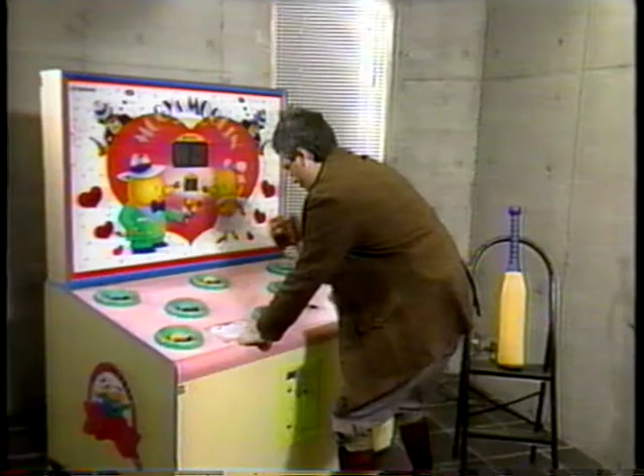I'm Dr. Zero. Z-E-R-O. Zero. And as my name suggests, I'm something of an expert on breakdowns. Welcome to my research institute.

Do you know this game? I love it. It's a great way of getting rid of one's frustrations, and I've got plenty of those. You know, you can hit the moles as hard as you like, but they still keep coming up. Of course, it's a lot of fun if it's just a game. But how much fun would it be if we think of the moles as equipment breakdowns in the factory,

Excuse me. Oh, come on. That's better. I don't know about you, but I have trouble with my equipment all the time. I suppose I'll have to call the electrician. Oh, where was I? Yes.

You know, lots of people think it's only natural for machines to break down all the time. Everyone gets the idea you can leave all after-sales service to the manufacturer of the equipment. In fact, I used to think that too. But it's not true. The point is, if you don't do anything, of course it breaks down. This applies equally to the home, to the office, and to the factory.

But remember, equipment is expensive. Why buy it if you can't use it? It should be used fully all the time. Like this tap. Now, just have a think about some common attitudes towards equipment, and I'll fix this.

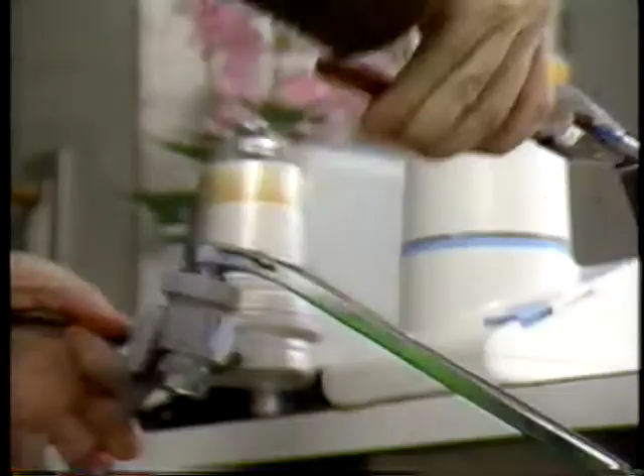Here are 4 common types of behaviour when we think it's only natural for equipment to break down. 1. We install equipment and leave it as it is. 2. We use machines but don't check anything after use. 3. We pay no attention to dust and dirt. 4. When a breakdown occurs, we call in the manufacturer. Good.

It's true though, isn't it? Most breakdowns are caused by very simple factors. Let me show you some examples. It's filthy. It hasn't been oiled for years. All the nuts and bolts need tightening up. Parts definitely need replacing. Things just aren't fixed on right. And basically, they don't work properly. It's the same story in the factory.

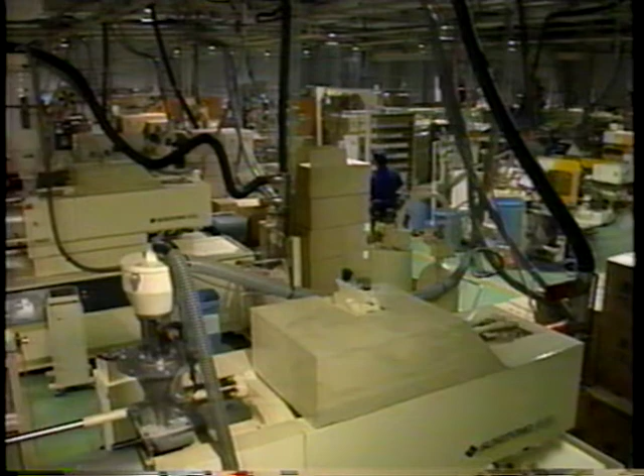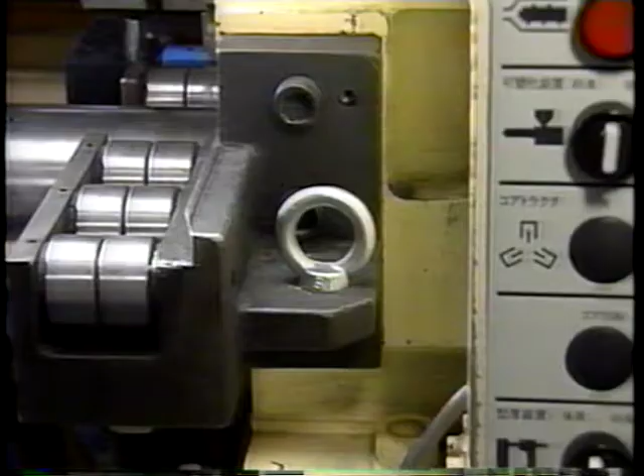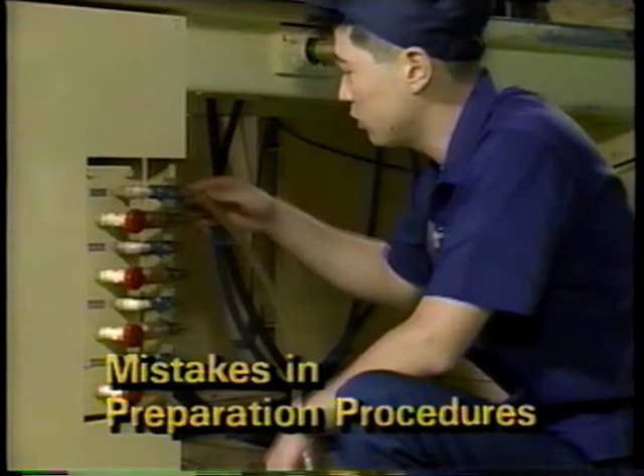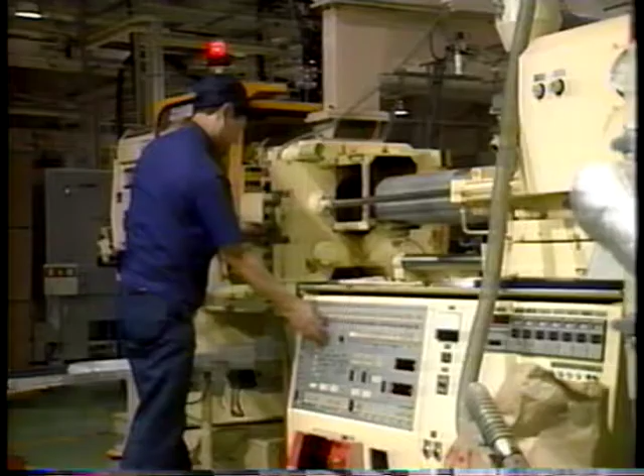The basic causes of breakdowns are these: dust and dirt, lack of lubrication, loose nuts and bolts, worn parts, mistakes in preparation procedures, faulty operation. In other words, breakdowns are mostly the result of misuse of equipment. The first step towards zero breakdowns is to ensure that all equipment is used properly.

Got the idea? You see, most of us start off thinking that machines should break down. But in fact, if we use them properly, we could get the idea that they shouldn't break down, that they should last for their allotted lifetime. It's as simple as that. Although actually, it's not quite so simple to achieve. We all want zero breakdowns. But where do we have to start looking?

When it comes to breakdowns, all we notice is major defects when we have sudden stoppages. Although breakdowns seem to happen out of the blue, their causes have been building up over time. Any moving parts like these gradually wear out, just like humans do. Even me.

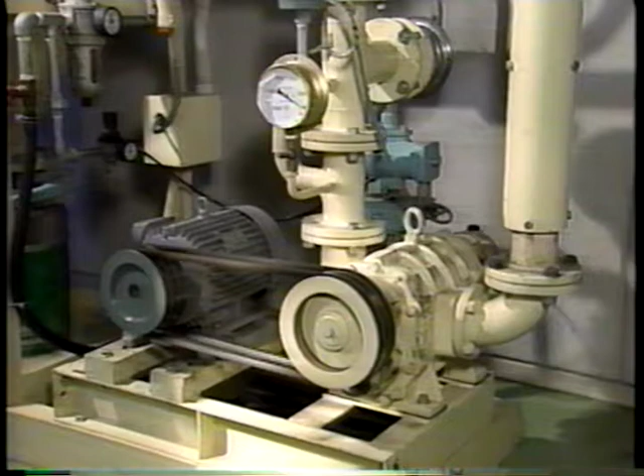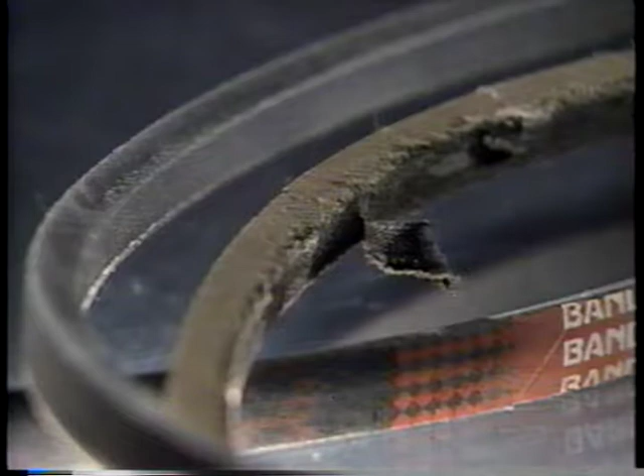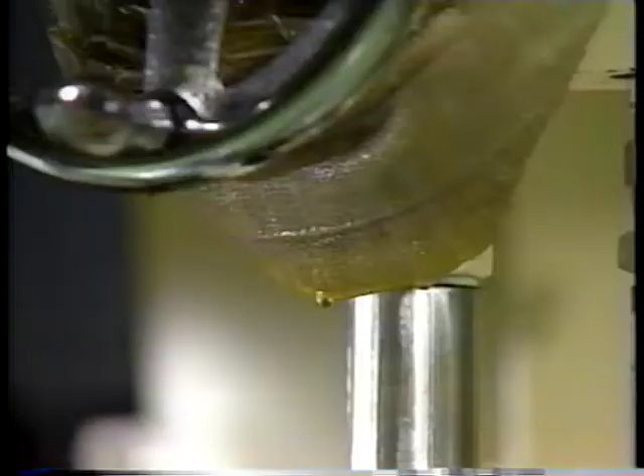The first cause of breakdowns is natural wear and tear, which happens even when equipment is correctly used. This is natural deterioration. Every machine has a natural lifespan, and this kind of deterioration is predictable and can and should be planned for. But improper use of equipment is a major cause of trouble. For example, if parts are not lubricated sufficiently, or if cleaning is neglected.

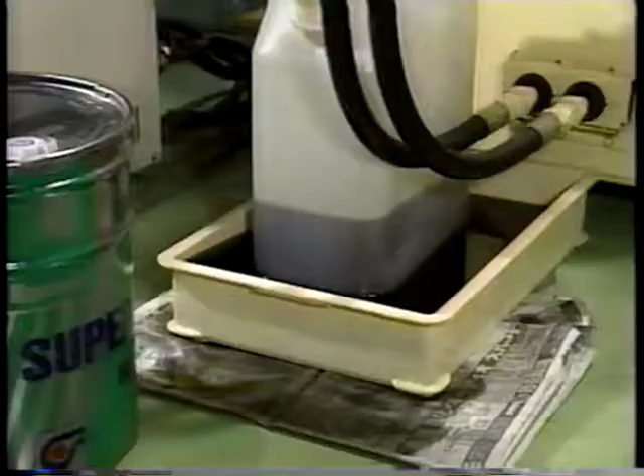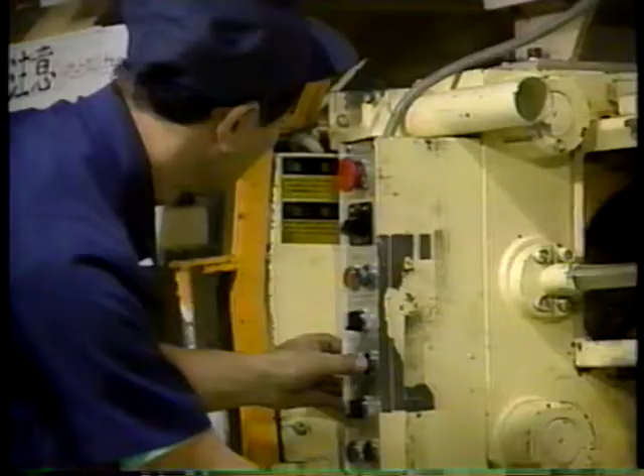Human errors result in aggravated deterioration, and this is a major cause of breakdowns. Laziness with regard to equipment maintenance can result in aggravated deterioration being added to natural deterioration. As time passes, many small defects pile up and result in major deterioration of the equipment. And a defect in one part easily leads to a defect in another part. The end result of all this deterioration is major defects which manifest themselves as major breakdowns.

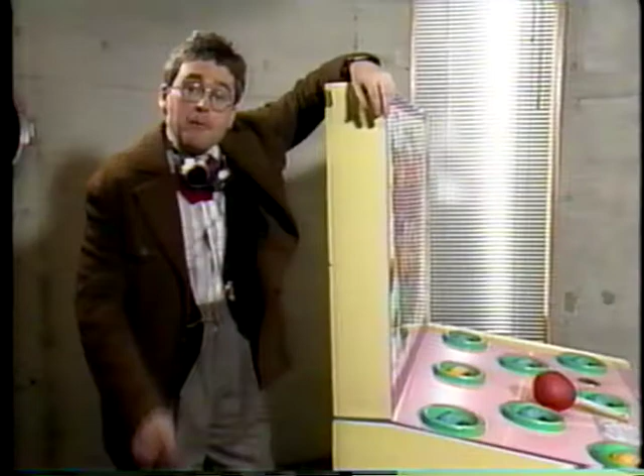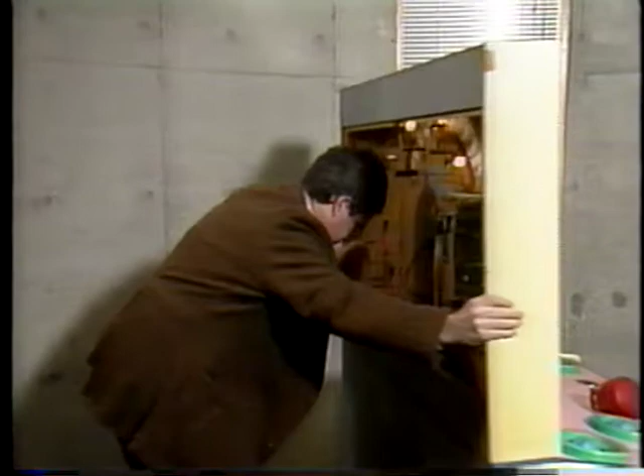Now do you see the connection with the moles? Breakdowns are just like moles. They're what we actually see. But the causes of the breakdowns are invisible. They're hidden down below. What we've got to do is to get inside somehow and reveal the causes. We know you're in there. Come out with your hands up.

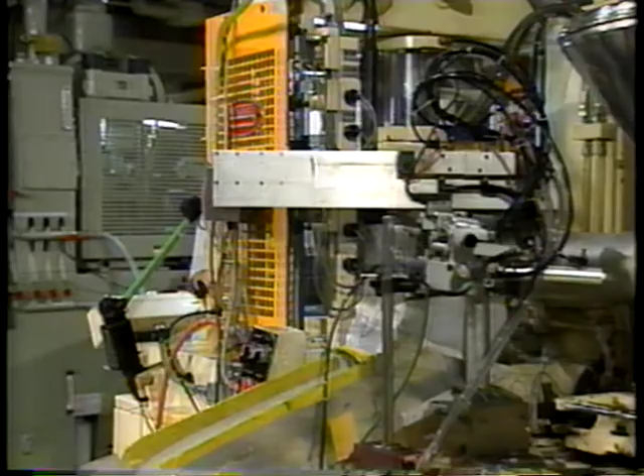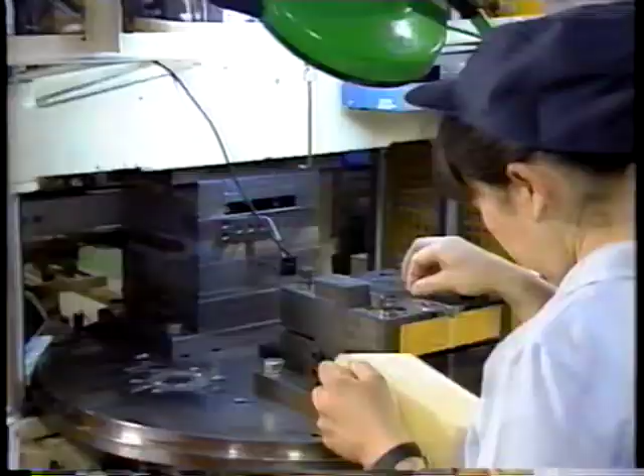Obviously, the person best equipped to find unseen defects is the operator who uses the equipment every day. The operator should be able to detect any small abnormality easily based on his or her familiarity with the equipment. Special sensors are not necessary for this. There is nothing better than using all your 5 senses.

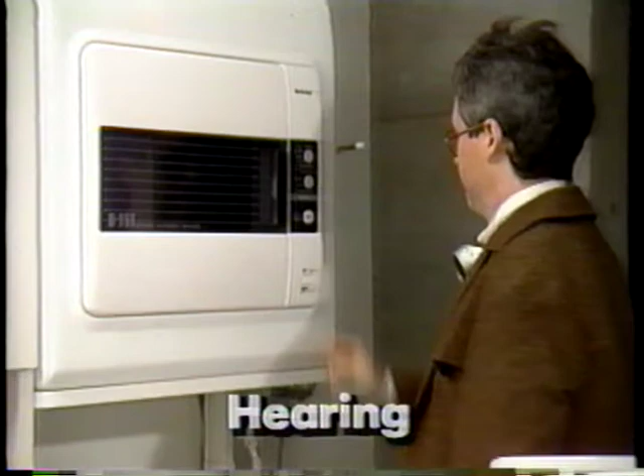The first sense is vision, which can be used to detect fractures, cracks, leakages, and so on. Second is hearing, to detect abnormal sounds, trembling, etc. The third sense is smell, to detect burning, overheating, gas leakages, and so on.

Fourth is touch. Both feet and hands can detect vibrations, shaking, and looseness of nuts and bolts, and the fingers can also detect abnormal temperatures. Fifth is taste. The tongue is a very sensitive instrument, and it can be very useful in detecting abnormalities.

The point is that we've been equipped with 5 natural senses. And we should use them all the time to give us information at work, just like we do at home.

Excuse me, I think the toast is burning.

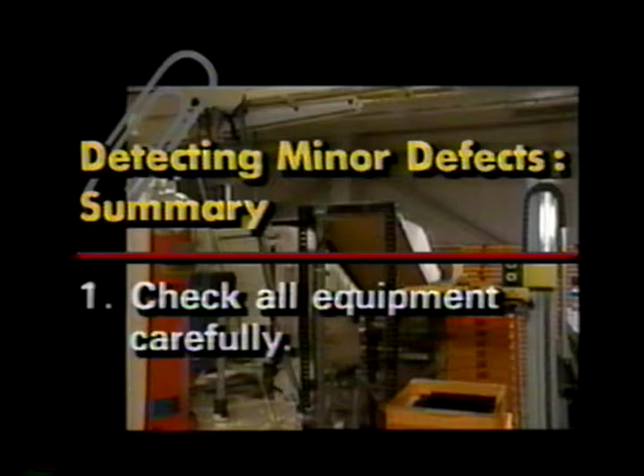Let's now summarize the 4 main points to help us detect minor defects in our equipment. 1. Breakdowns and visible defects are only the tip of the iceberg. This means that all equipment needs careful and regular checking. 2. We must find ways to reveal unseen defects before breakdowns occur.

3. Natural deterioration is inevitable, but we should avoid adding accelerated deterioration caused by human error. 4. All 5 senses should be used to discover abnormalities.

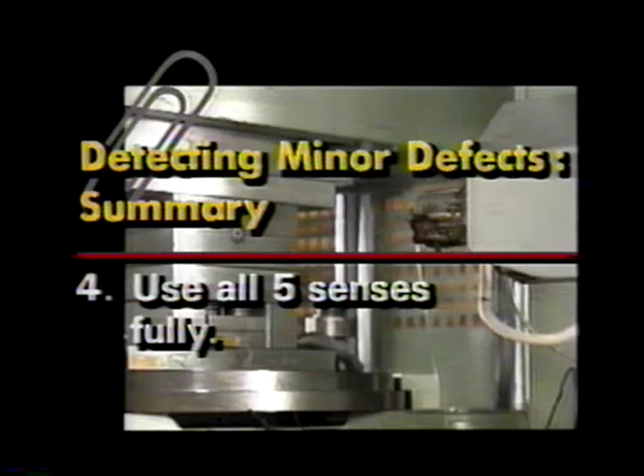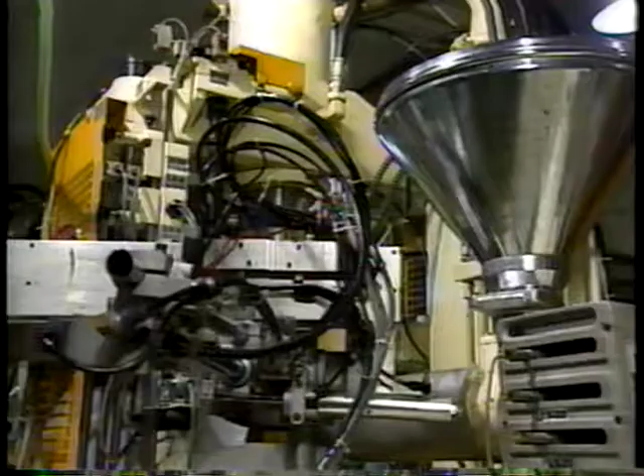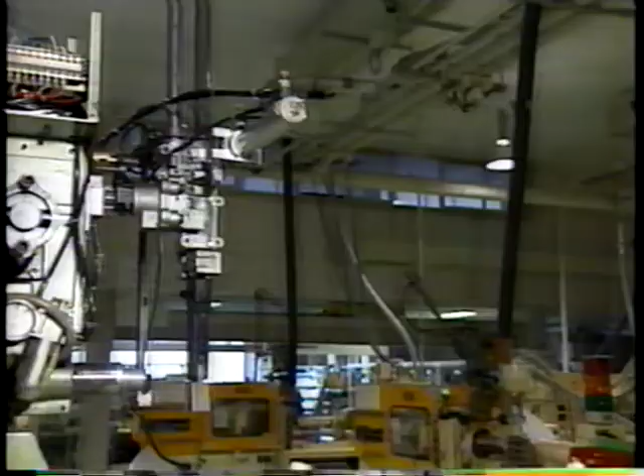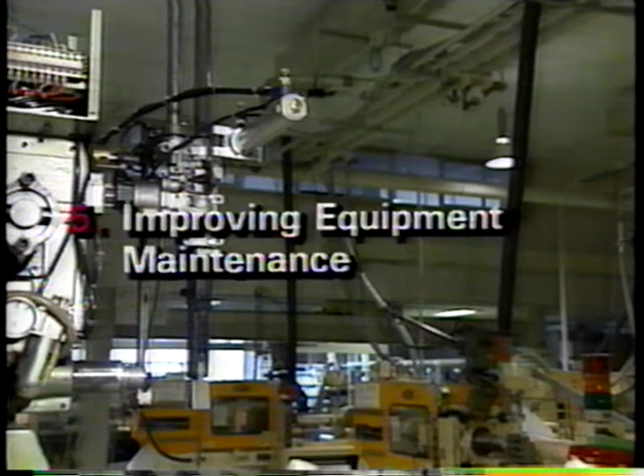Now let's look at 5 main points for improvement as we try to reveal hidden defects and avoid breakdowns. 1. Cleaning, tightening of nuts and bolts, and complete lubrication. 2. Proper use of equipment. 3. Revealing hidden defects and restoring original condition. 4. Reconsidering equipment design. 5. Improving equipment maintenance.

Yes, points for improvement. That's what we all need. Let's have a look at them in more detail.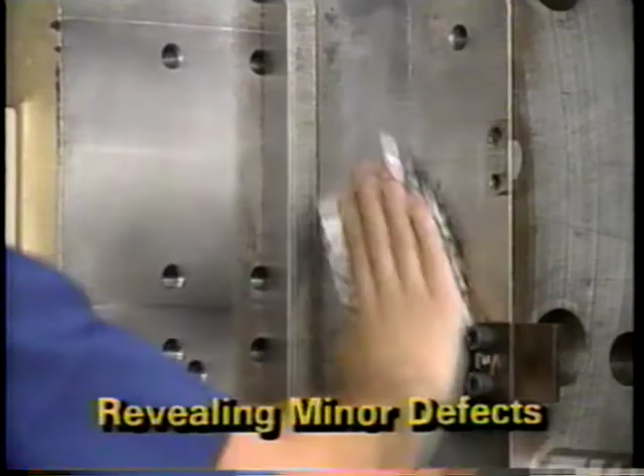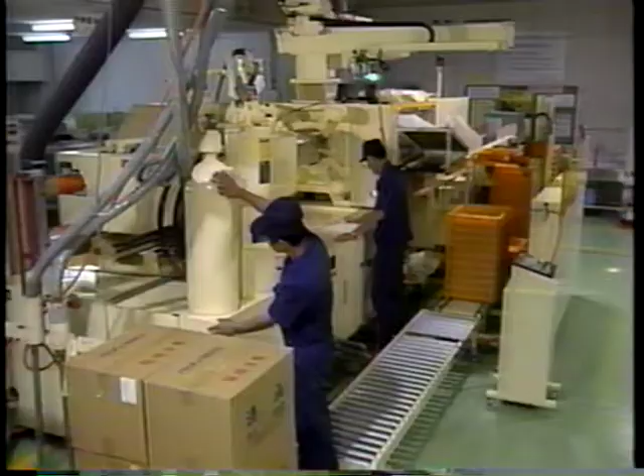Regular and thorough cleaning can reveal many kinds of minor defects, including dirt, worn parts, scratches, leakages, loose parts, and shape deformations. In other words, cleaning equals checking. This is an actual example of efficient and effective cleaning.

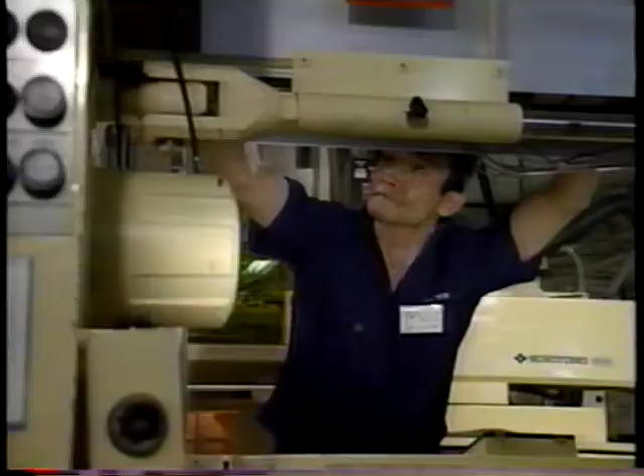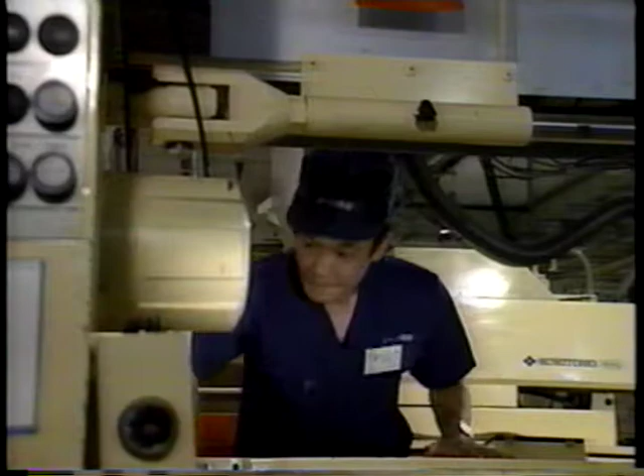In this factory, operations continue around the clock. Cleaning is carried out on each piece of equipment for 10 minutes both in the morning and the evening by 2 different people. The morning cleaning session focuses on discovering malfunctions or abnormalities that arose during the night shift. The evening session is simply for straightforward cleaning.

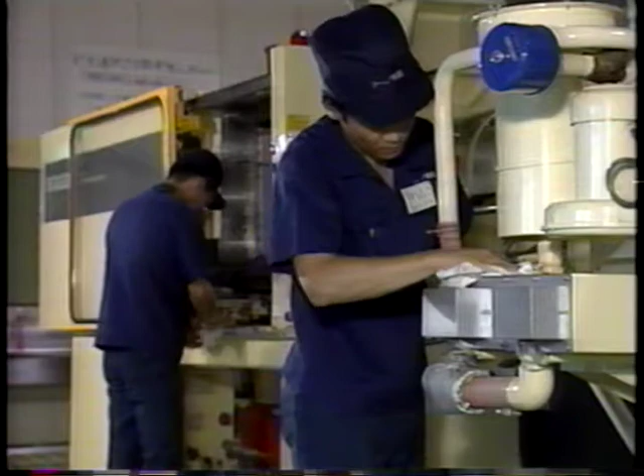This system means that every shift begins with clean equipment, and at the same time maintenance is greatly facilitated. The result is that breakdowns caused by dirt can be eliminated. Now some brief comments from the workers involved.

Loose bolts can quickly cause breakdowns, but we can only find which ones are loose if they're kept clean. Because we're cleaning the equipment every day, checking is made much easier. It's a very efficient method.

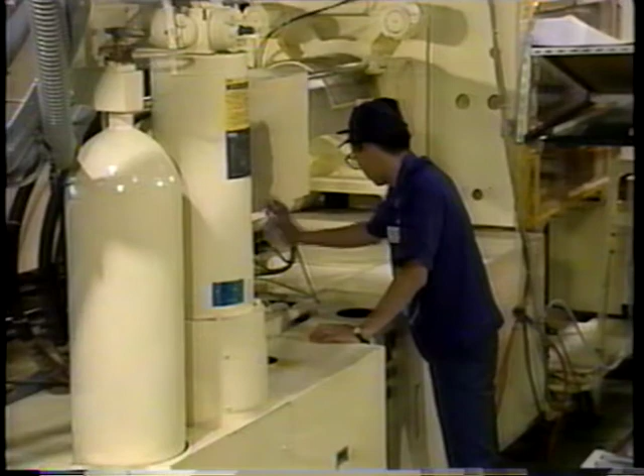The main point here is that a combination of regular cleaning and checking can keep the equipment working in just the way it is designed to operate, without stoppages. One loose bolt can cause vibration which loosens other bolts and so creates a dramatic chain reaction which ends in breakdown.

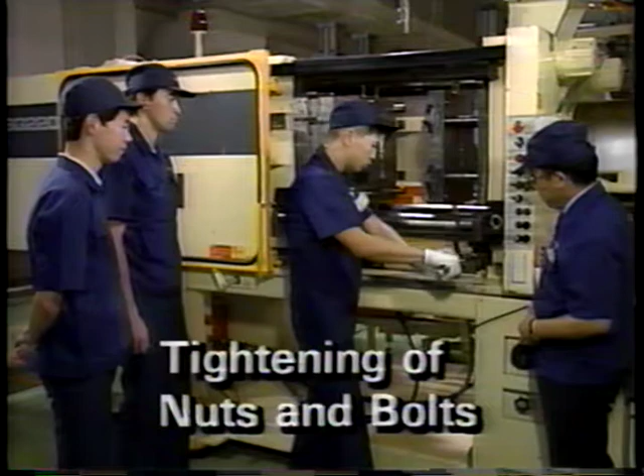There is nothing simpler than checking all nuts, screws and bolts to make sure they are correctly tightened and constantly rechecking to keep them that way. But this is often overlooked, even though it could cut breakdowns by 50%. Tighten it right and keep it tight.

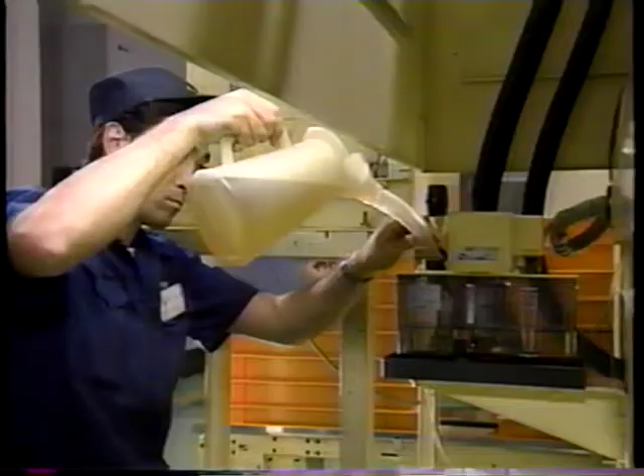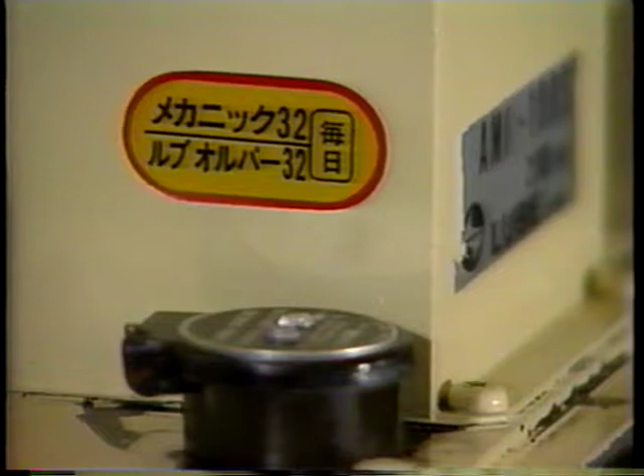Another obvious problem area is lubrication. Inadequate lubrication caused by laziness can lead to burning, rust and general deterioration of equipment. Clear lubrication labels, located right next to the lubrication point, can be very useful. They can indicate information such as type of oil needed, quantity and frequency of lubrication.

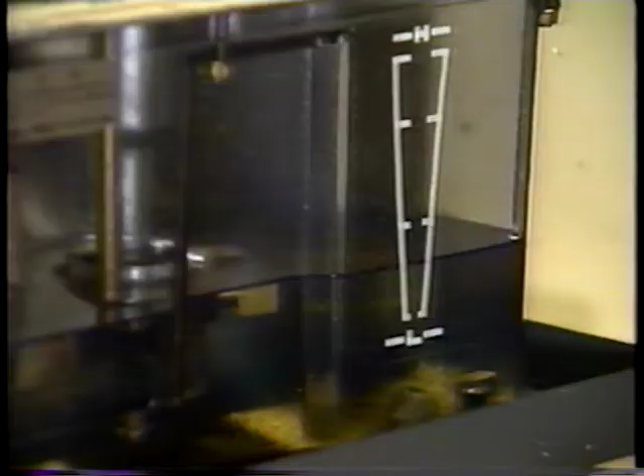These three straightforward processes, cleaning, tightening and lubrication, are vital steps for improvement in our drive towards zero breakdowns.

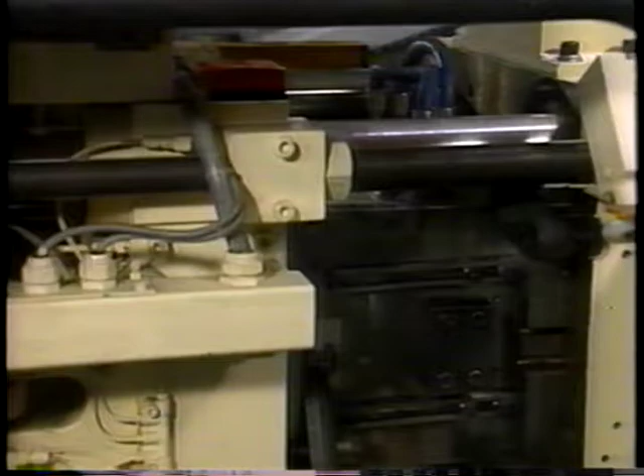Point 2 is concerned with how we actually use equipment. It's very important that operators really understand all the functions and correct operating procedures of any machines they are responsible for. Unless operating standards are strictly adhered to, breakdowns can easily occur.

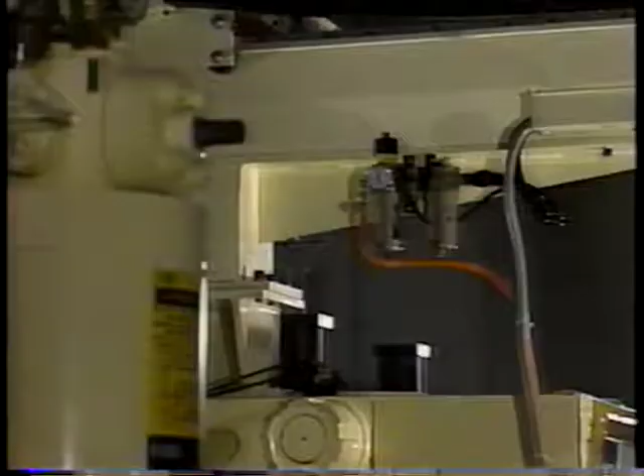As an example, let's take a look at a familiar piece of equipment, an air control unit which supplies lubricating oil to an air cylinder. The air filter removes dirt and moisture from the air sucked in from the outside. The air regulator provides the correct air pressure.

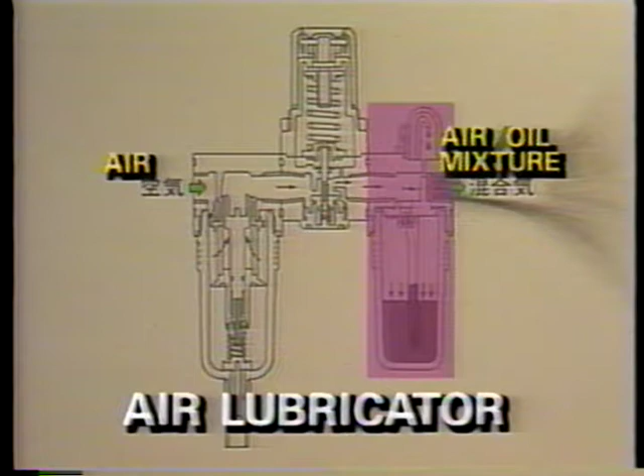The air lubricator uses that air pressure to deliver lubrication oil to the cylinder. To keep operations running smoothly, there is a fixed operating procedure for each part. Let's see what happens when these procedures are neglected. If the water is not removed from the air filter drain, rust can form inside the cylinder.

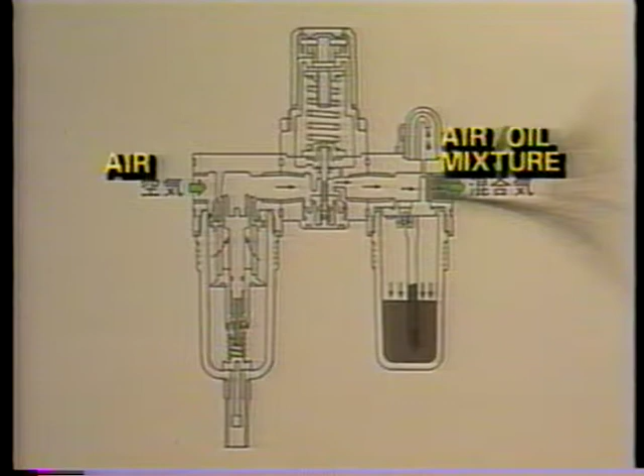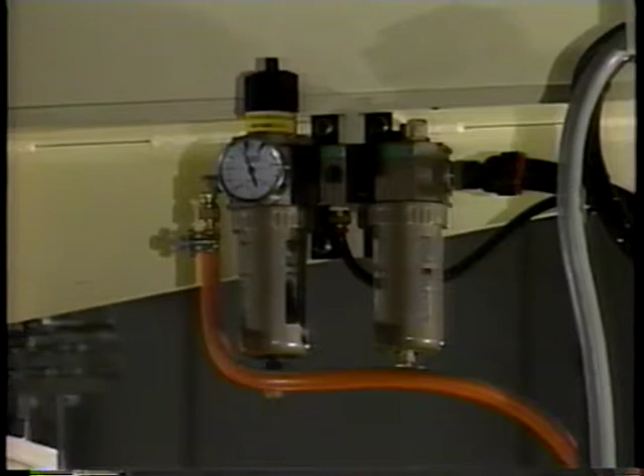If the air pressure is not properly checked, the pressure can become unstable. If a fixed amount of oil is not maintained inside the air lubricator, the cylinder will quickly wear out. And if the cylinder itself deteriorates, the result will be defective products. The point is that if we don't use every part of our equipment properly, defects pop up all over the place. Operating procedures for every part are rules which have to be kept. Break the rules and you break your machine.

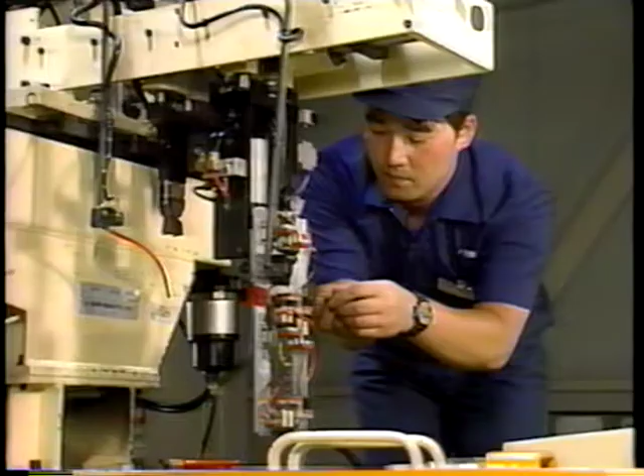As we've already seen, equipment naturally deteriorates with usage. But what can we do to keep deterioration to a minimum and avoid breakdowns? The watch has stopped. I just put new batteries in this last week. 1, 2, 3, 4. Now what's wrong with this?

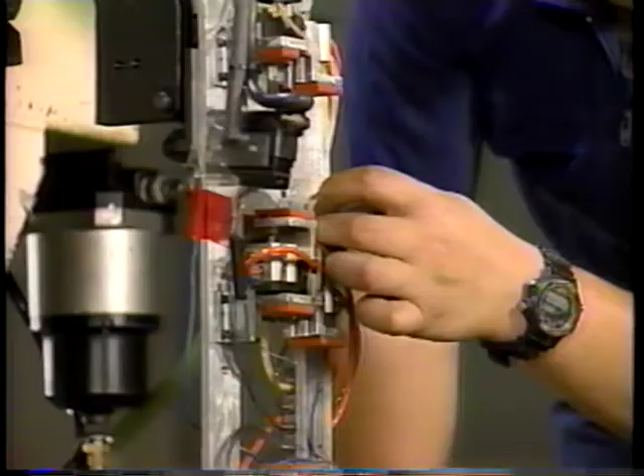Checking and inspection of all parts must be done thoroughly, so that any deteriorating parts can be spotted at once. As far as possible, we want to keep all the equipment close to its original condition, so that there is a proper working balance of the whole system. Once any deterioration has been detected and identified, it should be carefully evaluated and then immediately treated to restore the equipment to its original condition. This process may have to be repeated regularly.

Here are the three main points for the restoration process. Checking should be regular and thorough. Inspection standards and procedures must be carefully clarified. Maintenance activities must be fully implemented.

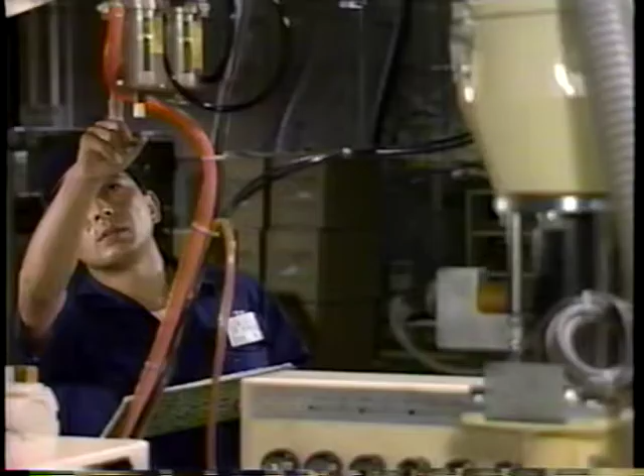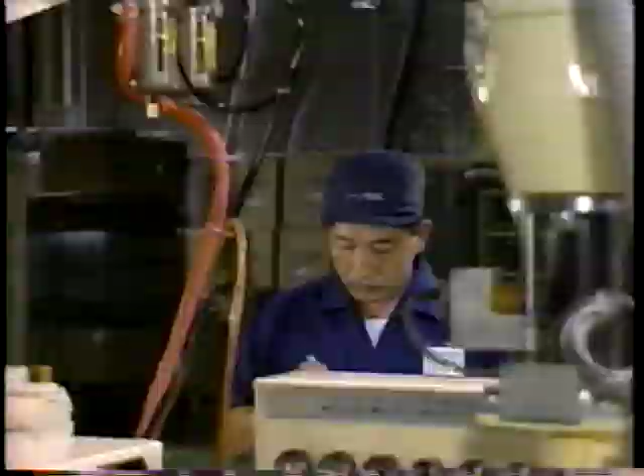There are many situations where maintenance is carried out correctly and operators keep a constant watch on their machines, but where the life of certain parts still seems much too short. In cases such as this, one solution may be to take a careful look at the actual design of the equipment and consider whether improvements could be made.

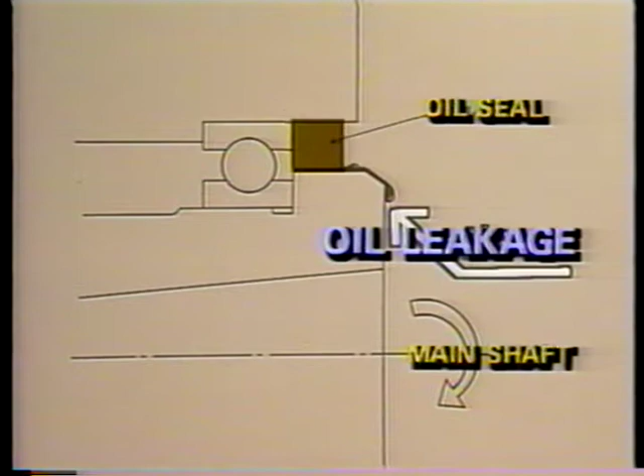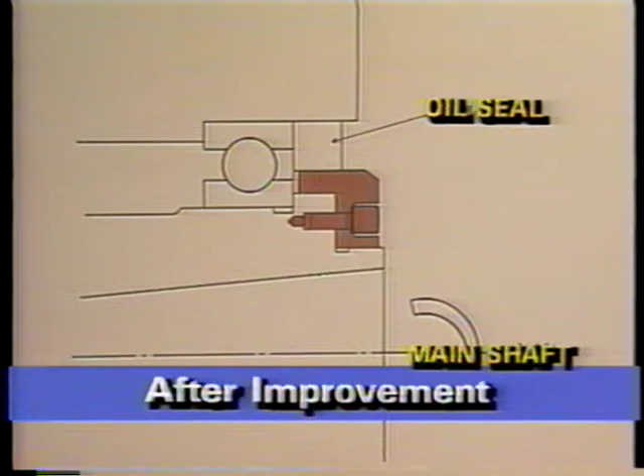But if we think of the design of the oil seal, maybe we can avoid long stoppages. If, for example, the main shaft was redesigned so that the part of it touching the oil seal was detachable, then removal and replacement would become very simple indeed. Another advantage of this kind of design improvement is that operators can do the maintenance themselves at the workplace. It's important to think about all aspects of parts design, including their size, type and function, and the materials used.

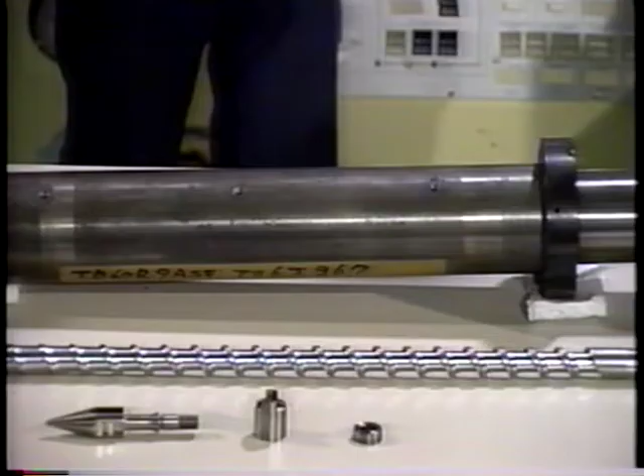Point 5 is really a summary of the other points. A lot of on-the-job training is necessary in the production section to make sure that all operators understand the function and structure of every piece of equipment they work with. This will ensure that the equipment is used properly and also help operators to find and evaluate deterioration as a basis for maintenance and restoration of the original condition.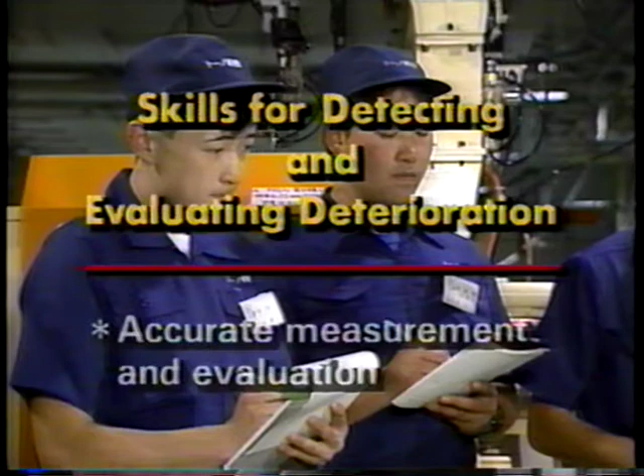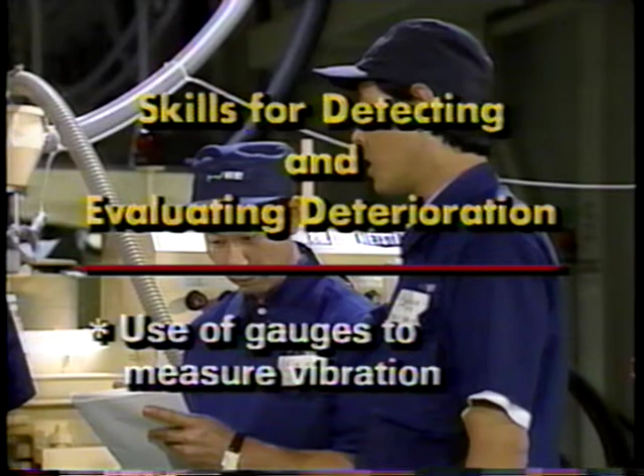Various skills may be required for detecting and evaluating deterioration. These include the ability to measure equipment accurately and evaluate defects, a full understanding of power systems in the workplace, and the ability to use simple gauges to measure movement, such as vibrations. Obviously, each workplace will have its own particular requirements.

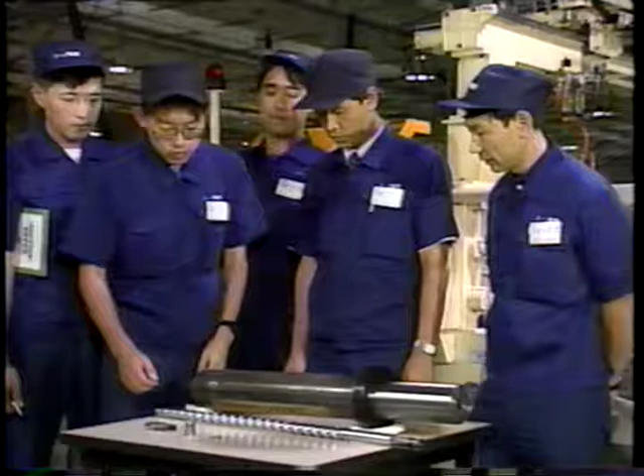Basic skills required for restoration of equipment to its original working condition include proper tightening of all nuts, bolts and screws, proper key adjustment, proper maintenance of shafts and their holders, proper maintenance of transmission systems, and correct procedures to prevent leakages of any kind.

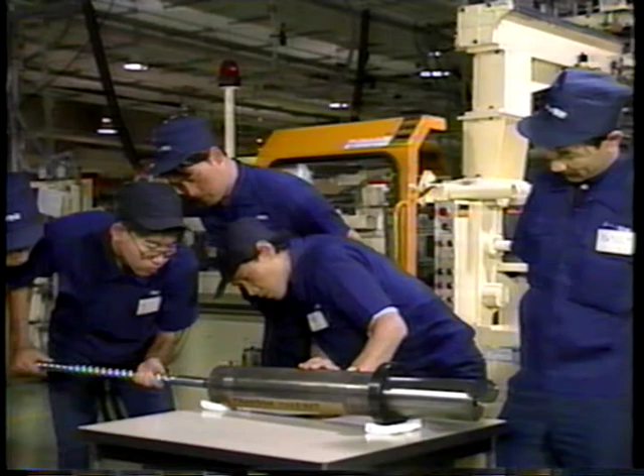If your restoration procedures are inadequate, then you will not be able to prevent breakdowns. But remember, acquiring maintenance skills does take time, and it is better to acquire understanding and skills gradually and fully, rather than to do everything in a hurry.

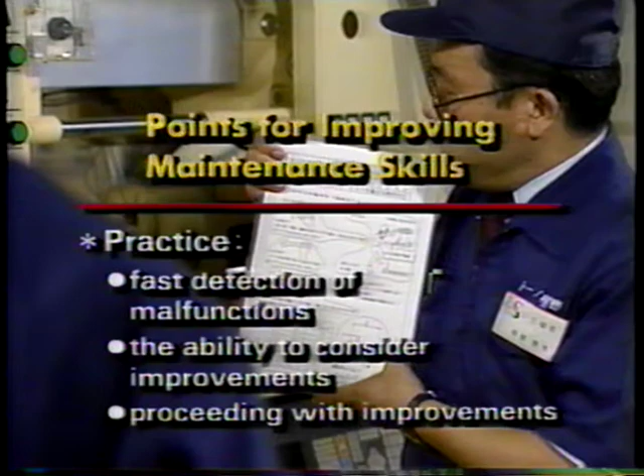Here are a few points which can help in the improvement of maintenance skills. Practice the ability to detect malfunctions quickly. Think about improvements, and then proceed with them in an efficient manner. Learn and digest everything concerning the structure and function of all the equipment you use. Make sure you fully understand the relationship between shop floor equipment and the quality of the final product. Study all the techniques required for repairing equipment yourself.

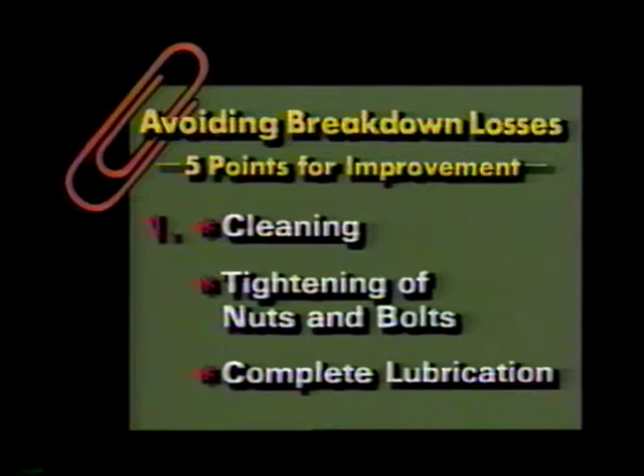Finally, let's review the 5 main points for avoiding breakdown losses. 1. Cleaning, tightening of nuts and bolts, and complete lubrication. 2. Proper use of equipment. 3. Revealing hidden defects and restoring original condition. 4. Reconsidering equipment design. And 5. Improving equipment maintenance.

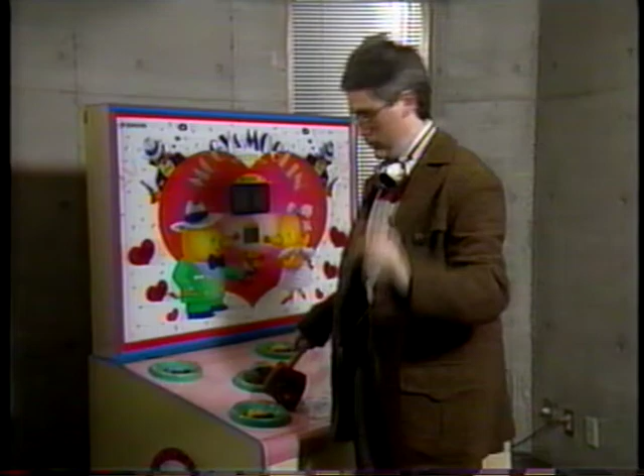Well, there we are. 5 vital Kaizen points. But it's no good implementing just 1 or 2. Remember to use all 5. Then you can come up with various good ideas to serve as countermeasures against deterioration and breakdowns. And remember, our ultimate goal? 0 breakdowns.